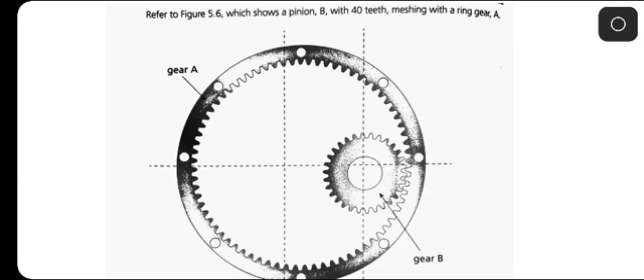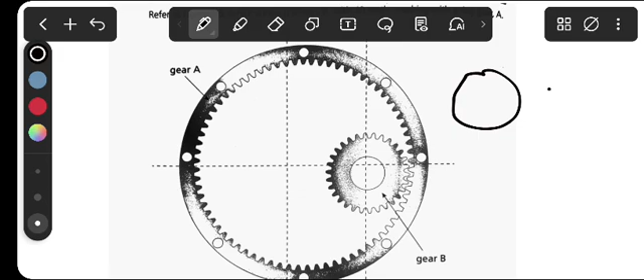So we call this a ring gear. Initially we did gears that are driving a simple drive. You see, the gear was outside. We were driving outside. Now here we have the internal. It's inside. We call this a ring gear because it's acting in the inside part, internal, right? Okay.

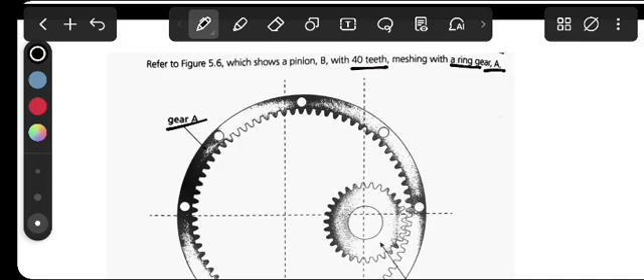Refer to figure 5.6, which shows a pinion B with 40 teeth meshing with the ring gear A. Here is gear A. We don't know its teeth. We are not given the teeth, they just said gear A. But gear B, we know the teeth. The inside one, the smaller one, is 40.

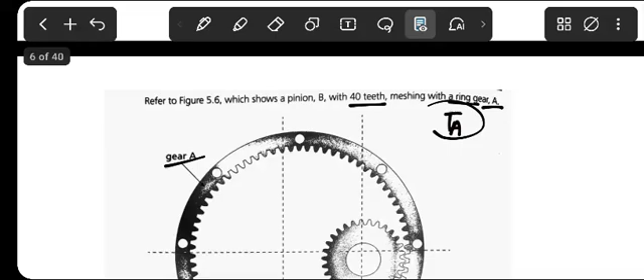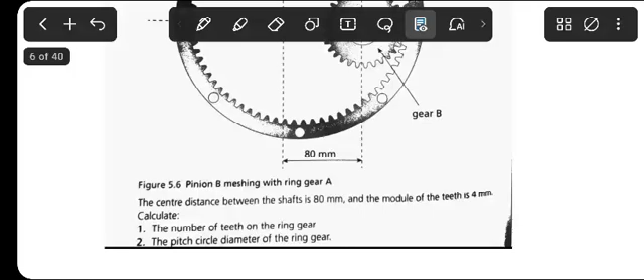So, as you can see, this is the pinion meshing with the ring gear. You see this is acting at the center, from this center until there. Guys, this is the center distance. It's 80 millimeters. So the center distance between the shafts is 80 millimeters and the module of the teeth is 4 millimeters.

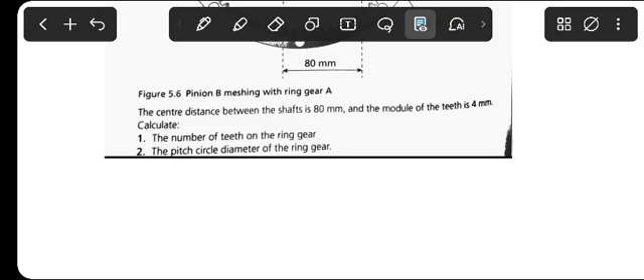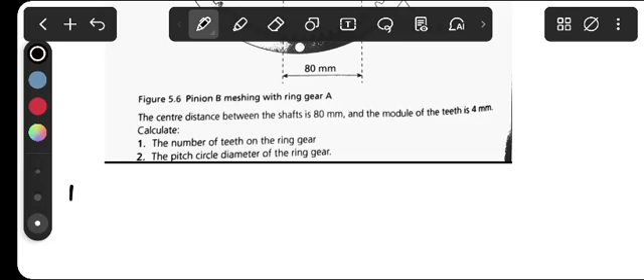Calculate number one, the number of teeth on the ring gear. We are not given it. This is the ring gear, the round one. That is what we want, the teeth of gear A, TA. How can we get that? Let's take advantage of what we've been given. We've been given the center distance.

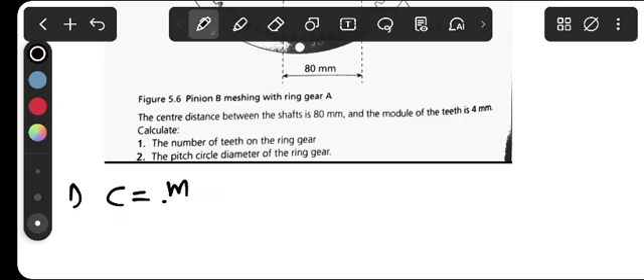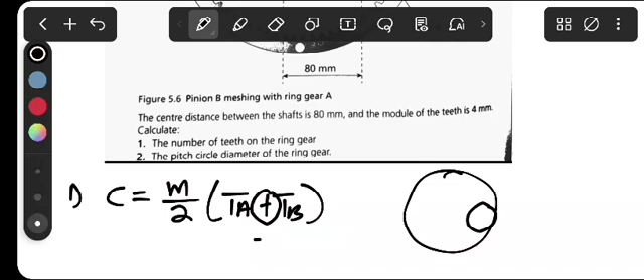We know that center distance is given by module divided by 2, times TA plus TB. But now, because this is a ring gear acting on the inside, you don't use plus. You change the symbol, it becomes minus. If you have gears driving each other externally, you use plus. Since it's acting internally, we use negative. Do not forget that this will be negative: TA minus TB.

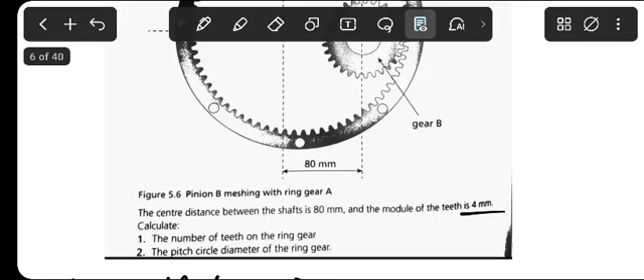Meaning that you take the big gear, the ring gear, minus the smaller one, the one that is inside. So we have the center distance, 80 millimeters. Module is 4, divide by 2. TA we don't know, it's the one we want to calculate. TB is given: gear B has 40 teeth.

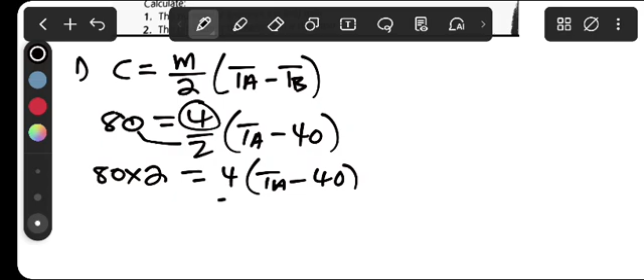So we want TA. Multiply: 80 times 2. Then divide by 4 both sides, and the 4s cancel. So we're left with 80 times 2 over 4 equals TA minus 40. Take the 40 to the other side, it becomes positive: 80 times 2 divided by 4 plus 40 equals TA. Are we together?

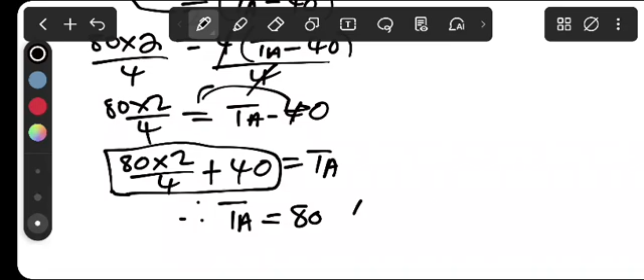Now, when you are adding, teeth A, if you punch this, 80 times 2 is 160, divided by 4 is 40, and 40 plus 40 gives 80 teeth. That is what we have there.

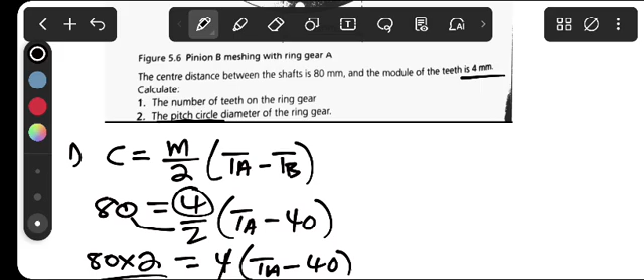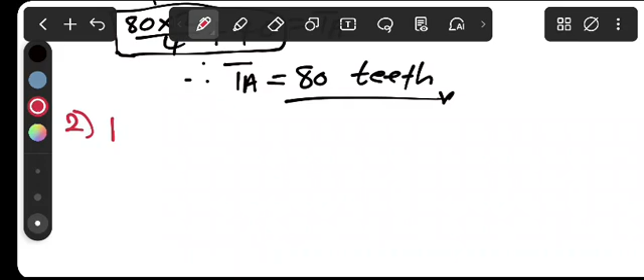Now B, calculate the pitch circle diameter of the ring gear, gear A. The formula won't change. The one that changes is the one for center distance, where we put minus instead of positive. We know that PCD equals module multiplied by the teeth of the gear we're focusing on, the ring gear, teeth A, which we have calculated.

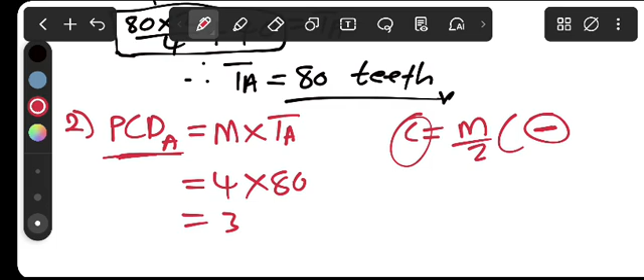We know that the module is the same throughout. As long as gears are meshing, touching and driving one another, even internally, they have the same module. So we have 4 multiplied by 80. This gives us 320. The module was 4 millimeters, so this will be 320 millimeters. This is our PCD.